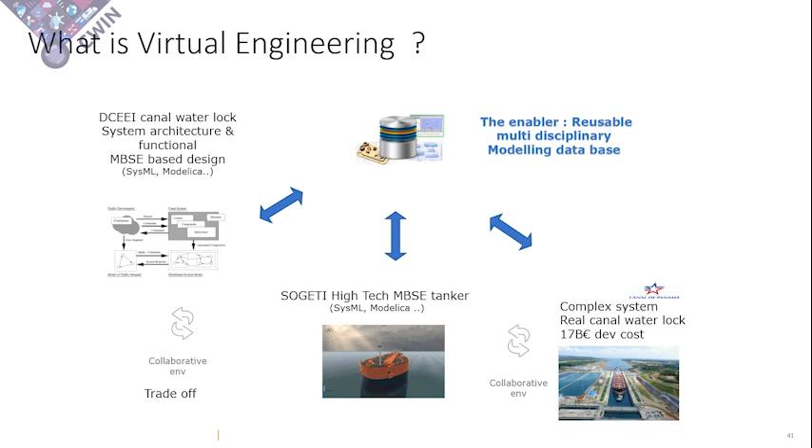System engineering has been used for many, many years, as soon as we have very complex systems to develop. So time to market, performance, cost, quality have really been the main drivers for system engineering. What is new today is really the fact that new technology is popping up every single day. And when you have a complex system, usually you have a development time which could be several years.

And you really have a big question to understand if you need to integrate that new technology as part of your development, which is already ongoing now, or if you wait 5 years from now to integrate this brand new feature, which will, by the way, maybe be obsolete by that time. When you are in virtual, you could really assess this new technology by modeling, understanding the impact on your system design. And then you could take a decision to integrate it or not.

The last point, which is very interesting as well on the market, is the fact that we are really working in a more and more collaborative global environment. What that means is that, again, to design a very complex system, you are not making it alone. You really have an ecosystem, and this ecosystem is more and more going for co-design. So that means it's no longer a specification that we have to fulfill. It's more an exchange. If you want to exchange in co-design, clearly, if you are in a virtual space, you could work very efficiently across the whole ecosystem.

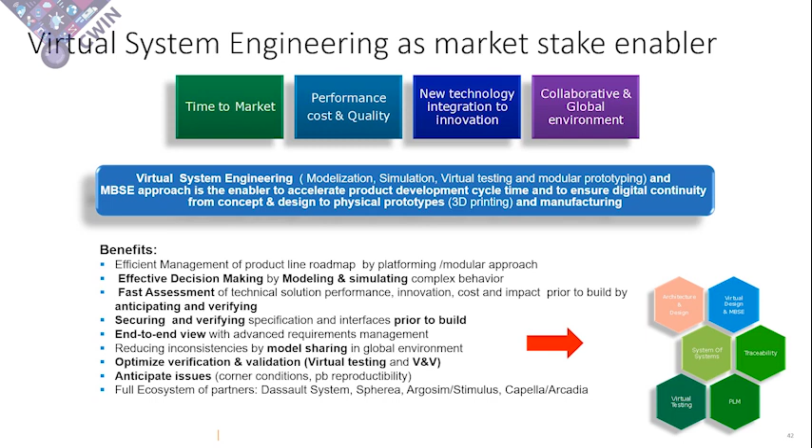Modeling. So usually we always have some part of modeling in system engineering, but most of the time it's not connected all together. So that means you will have the mechanical team doing its own simulation.

You will have, let's say, the electrical part doing its own simulation. But they are not discussing sometimes together because they are not using the same model interface, they are not using, by the way, also the same simulation core. The whole approach, the famous MBSE approach, model-based system engineering, is really here to reduce the discontinuities and make sure that we have a single environment where all the models could, in quotes, speak together.

What is also very interesting is that most of the time, the simulation and the modelization is pretty far down in the development cycle. And with a really brand new approach, we are modeling at the functional level, but we are modeling as well the requirements. And when we know that from the requirement standpoint, it's 50%, I would say, of the root cause of projects failing, 50% is coming from requirements. So you understand really the big stakes, which is to be able to simulate and have a model from the requirement.

And for sure, going again to the verification and validation, we could use the approach of having the models already there, having brand new equipment coming one by one, to really use the simulation to prove that your equipment is fitting what you have been designing. And then the integration, the system testing, will be much easier because you have already used your simulation as a first pass to make sure that this equipment is running well.

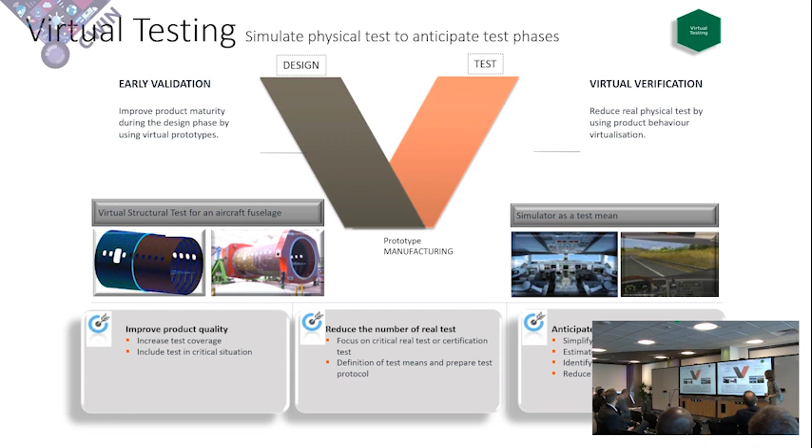Virtual testing, a few words, which is pretty interesting. The early validation from the specification is for sure well known, but maybe sometimes what we call here the virtual verification a little less. This is what we call hardware in the loop. I don't know if you are familiar with this word, hardware in the loop. But the idea is to be able to reduce the number of real tests.

And knowing that once you have the hardware, then the cost is there, and it is a tremendous amount of money spent here for the verification and the validation. If you use the fact that you have invested up front to get your model during the design phase, you could continue to use this model to reduce the amount of tests that you will do. And again, anticipate your equipment, so that when you connect two pieces of equipment together, the interfaces will be proven and the behavior will be proven.

You anticipate the problem detection, and for sure you reduce at the end the lead time overall, and you secure your system. So what I propose now is to move to the reality of the MBSE approach. So what we have done, we have really taken a tanker, done in virtual, within really a digital continuity approach. Okay, I will show you the demo, and then we will come back to what has been done.

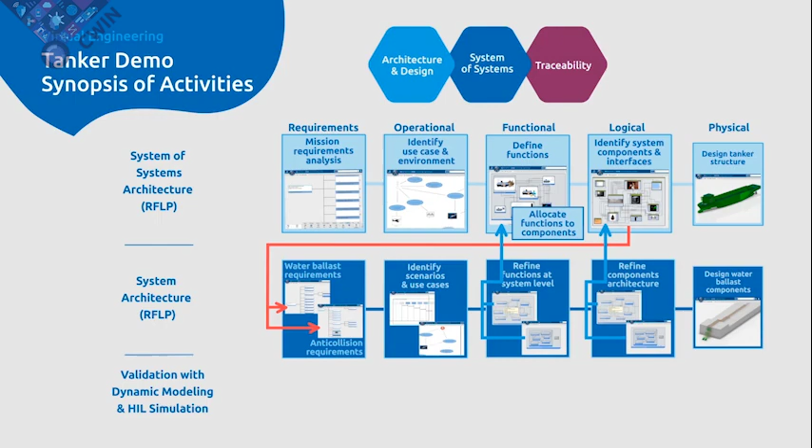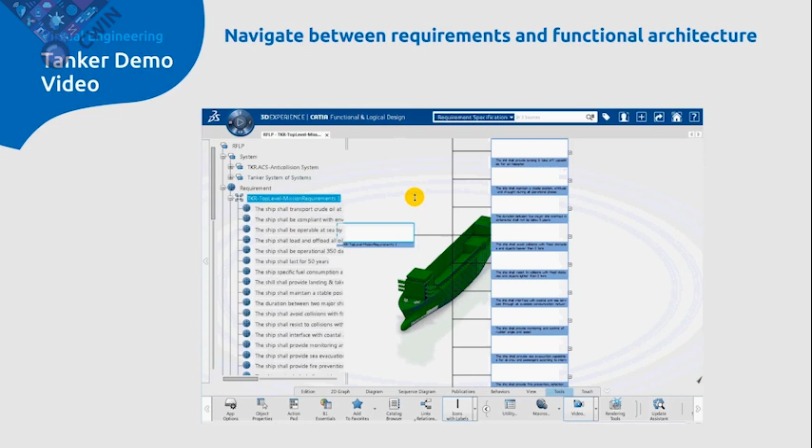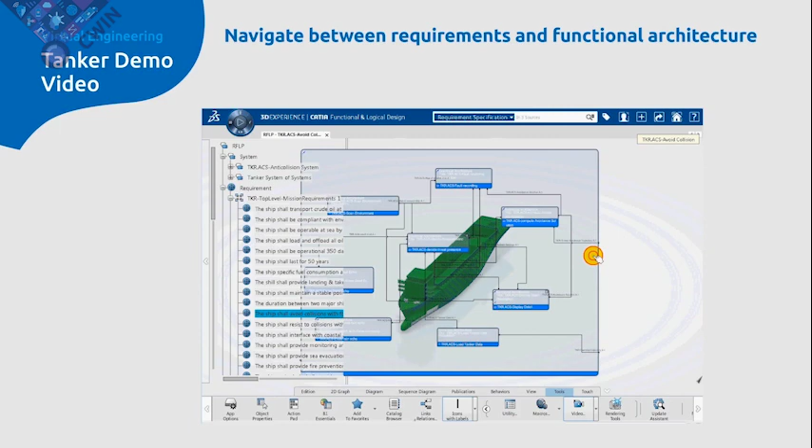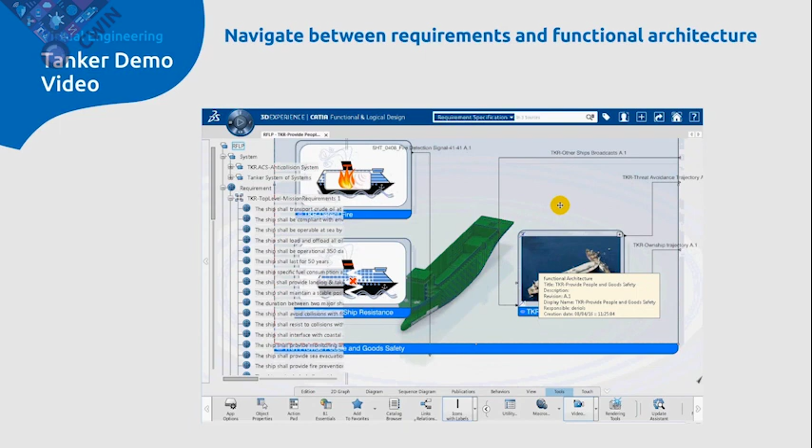So you recognize the mission, the use case, and the function. And here we are inside the tools, because this tool is really allowing us to go into a single environment where we could share everything. We have started from the main needs and the requirements associated to the mission and its operational use case. And then each time you continue to derive from requirement down to some functional breakdown. And from one function, you could again do this fractal approach to refine some sub-function, and from any sub-function, you could go to a physical allocation.

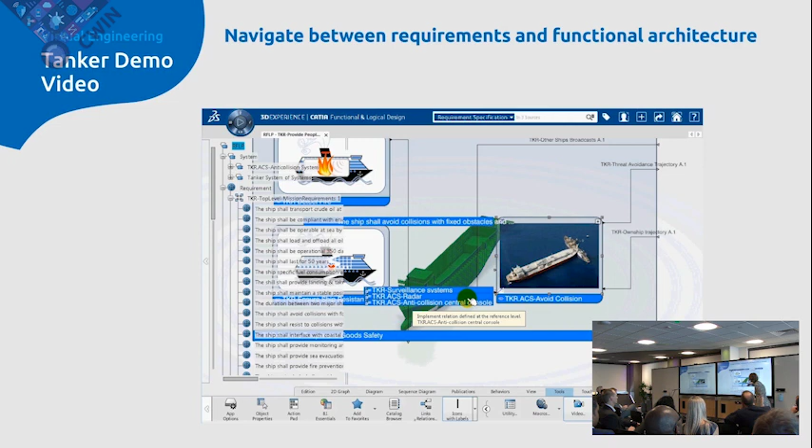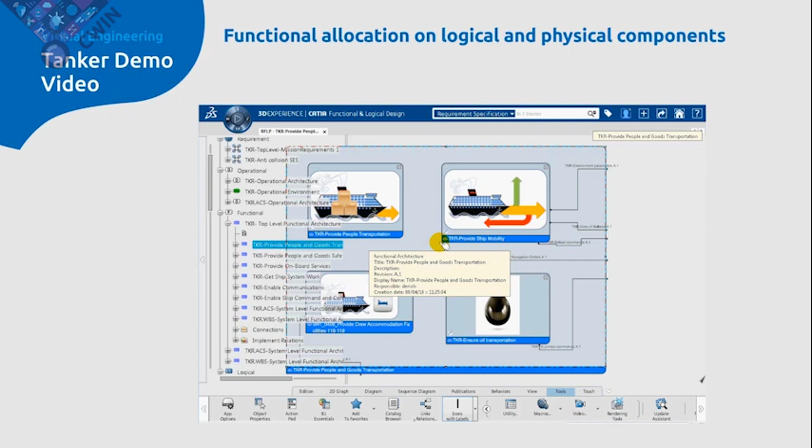All the time here, you could see on the left side your requirement, and you could find all the related functions associated to a single one. And again, with this, what I call fractal approach, you refine each time your system to subsystem, subsystem to equipment. So that means you really go to the physical layer. So now let's move to one function which is on the water ballast.

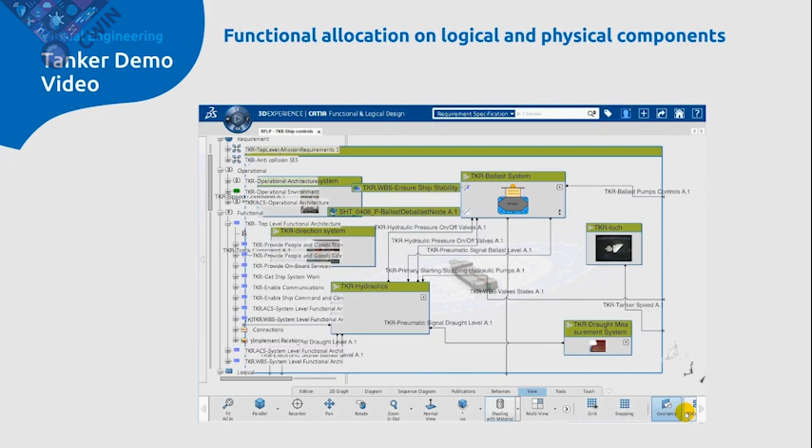On that one again, each time you could go back to your requirement, and when you scroll down inside the function, you will be able to go to your physical design and your modelization, which will go very, very deep inside, I would say, the characteristics. For sure, anytime you could locate as well on your 3D view of your system where the physical allocation is. And let's move now to the core of the modeling.

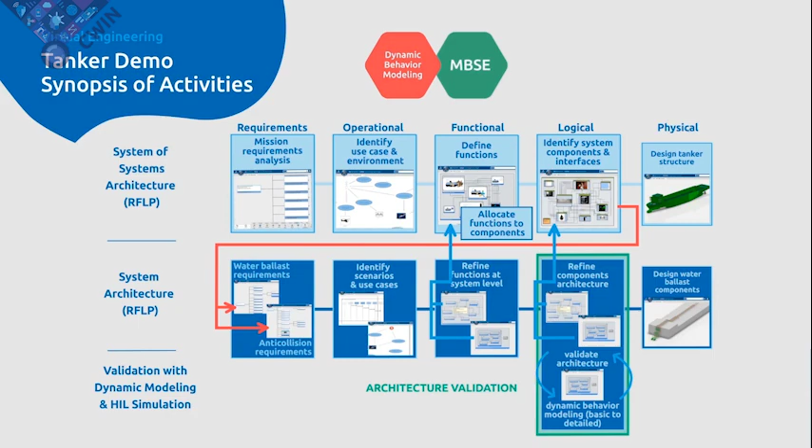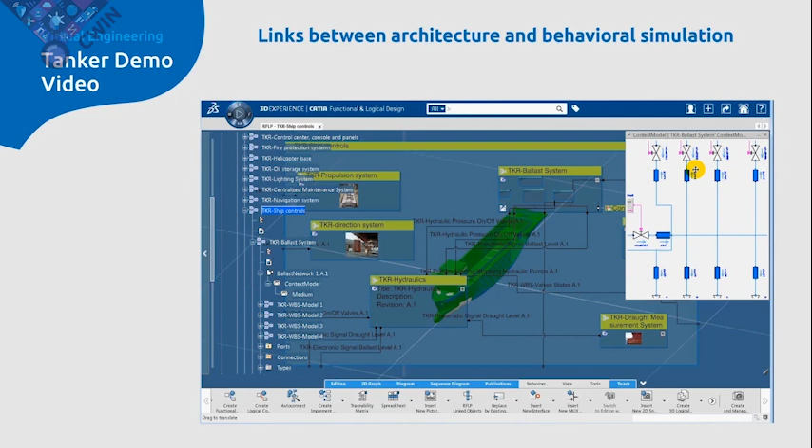What is very interesting in this approach is that you could mix several kinds of models. You could mix some behavioral models, not very precise, with very precise models. And you play all the time between these two levels of representativity. So here, again, this is a real case of implementation of a water ballast with several pumps. And we have selected, I would say, a modeling upon the pump. So physical allocation, real interfaces, as it would be done physically. And from there, we put here some electrical characterization of the pump in virtual.

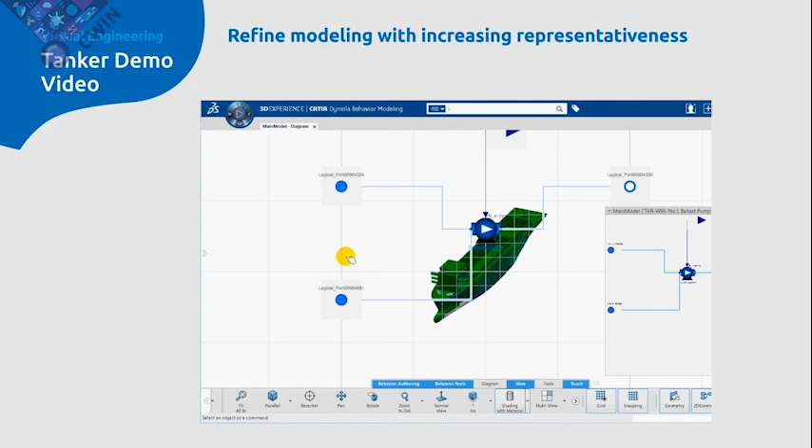And then we see the result. So that means, do we have the expected behavior of our system? That means the tanker is being filled with water, so going down. And we have as well, as you will see, generated some failure. And that one is really where the modeling and the simulation are very interesting, because you could try to anticipate what will happen if.

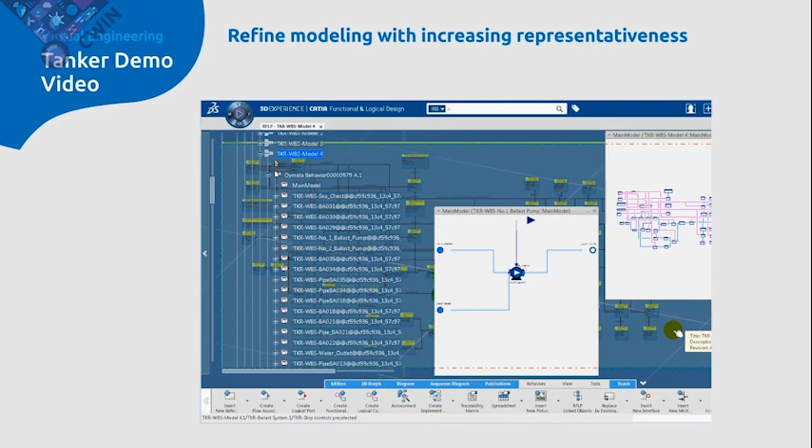So here again, you will see the demo running. So currently your pumps are open, and then you start really to fill the tanker. And all of a sudden, we will block one line while the other is going on. So we have generated a failure. And then you could see if your tanker is having some rolling. Is it acceptable? Not acceptable? Do you have to redesign it?

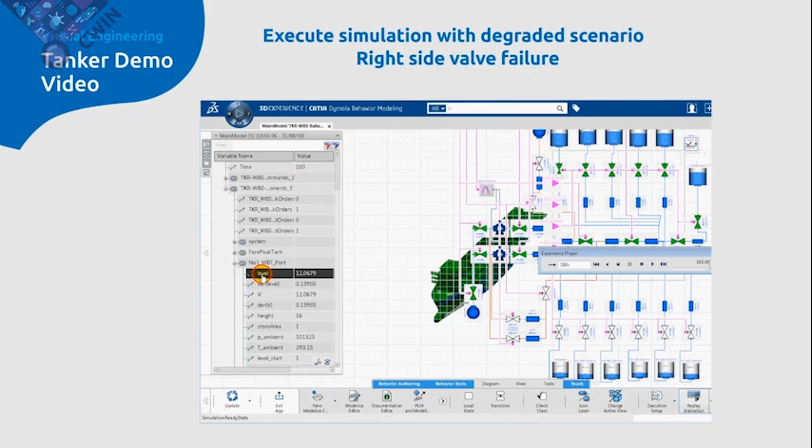Everything is in virtual; you have not spent a single penny, I would say, on a real part of the equipment or part of the tanker.

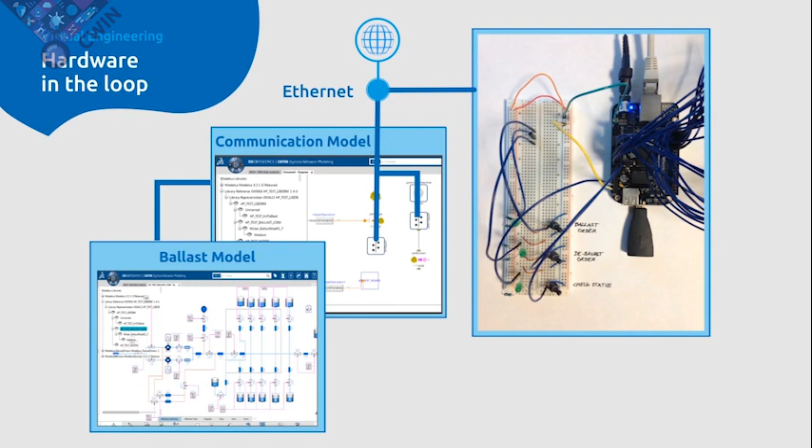Last but not least, the famous virtual testing and the hardware in the loop. So we have implemented a command and control software simulation here to do a small hardware in the loop. And here you link your simulation with a physical equipment. And again, you could see if your physical equipment interfaces are good, and second, do you have the right behavior? Okay?

So again, I will not go back to all the benefits. This is what we have covered at the very, very beginning. But we will go back now to the presentation.

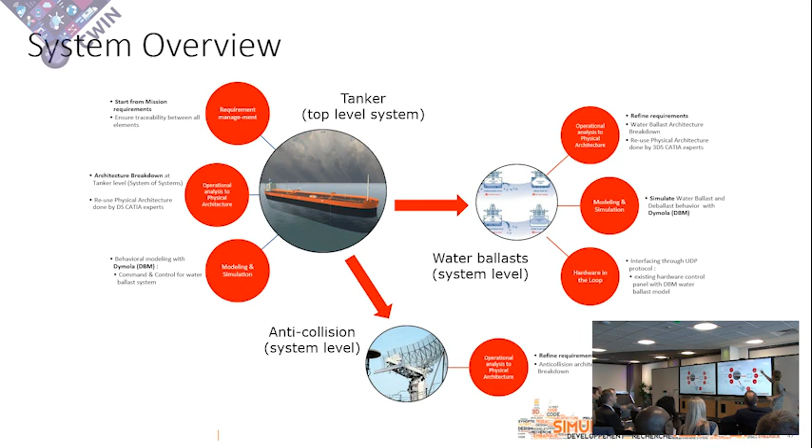Here, what I want just to show you, because we have discussed that inside the demo, is what I call the fractal approach. That means you repeat it on your system level, you repeat it on your subsystem level, and you repeat again and again. What we want to do is really to be able to use your model at several levels of representativity and to mix all of that to be able to get a digital twin.

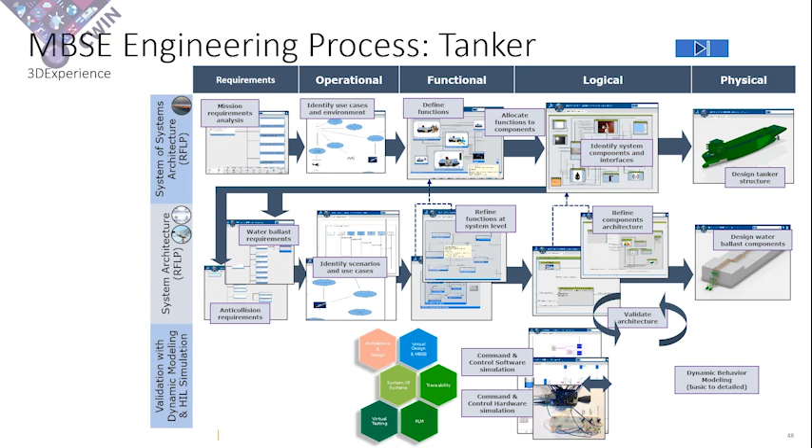So that's what we have seen in a single type of environment. We have done the same approach with different tools. It works, same result. The only thing is that you have discontinuities. And if you have a failure and you want to go back to see what is inside the requirement, perhaps the requirement is wrong, then it's in the head of the engineer, because you have no more link. And here, I have a failure. I could cross-check if it is inside the functional block. I could cross-check that maybe my requirement was wrong.

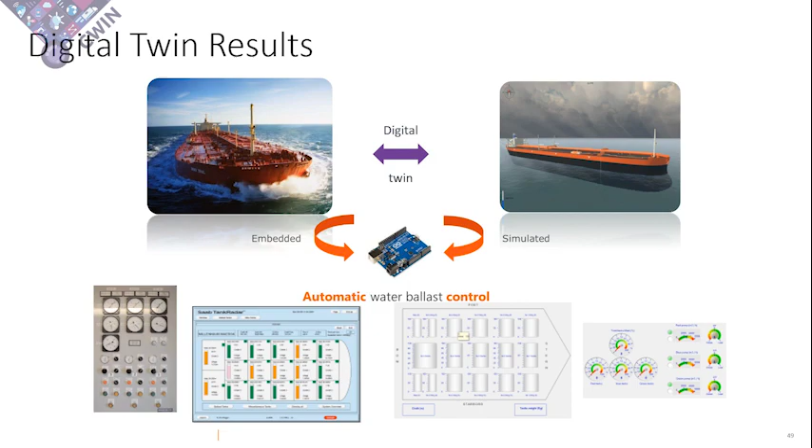The result, you have a full digital twin. You could master whatever you want in terms of control panel as well. And last but not least, you could then exchange this model with another company which is making the infrastructure of the canal lock. And then you could really cross-check that your design will be able to fit inside the canal lock. This is really the co-design altogether. Different companies, different stakes, same virtual environment.